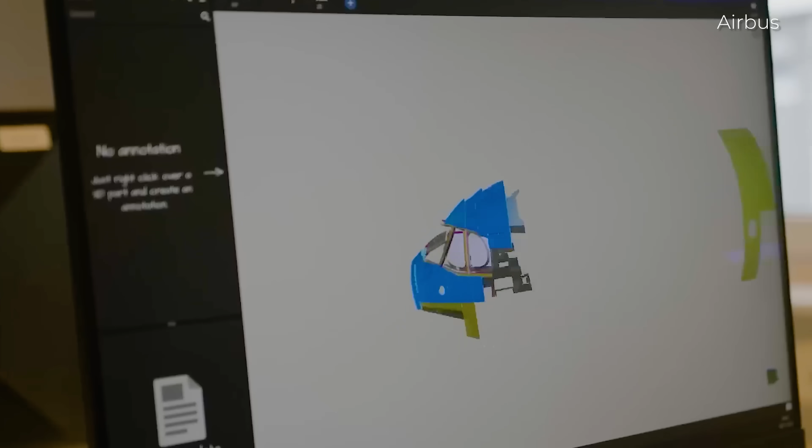For decades, Airbus and Boeing have shaped commercial aviation through successive aircraft, from the Airbus A300 in the 1970s and the Airbus A380 to the Boeing 777 family. Both manufacturers have redefined airline fleets worldwide. So in this video, we take a look at why Airbus has delayed its next clean sheet aircraft until at least 2031, what technologies are already under development, and why supply chain problems, engine delays, and record order backlogs have become a bigger priority than redesigning an entirely new airplane.

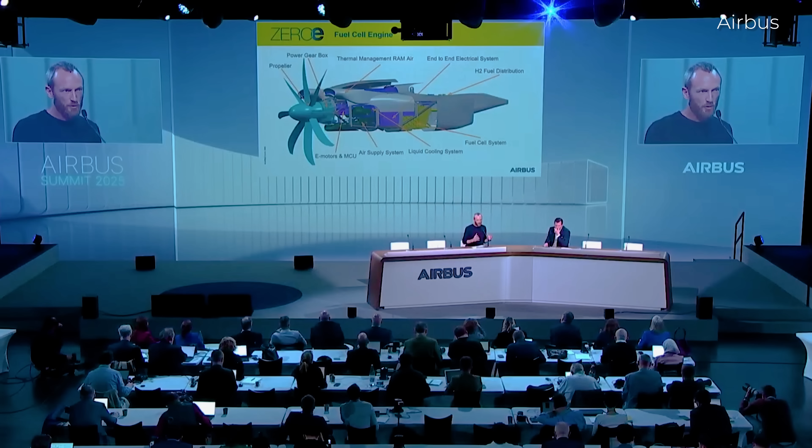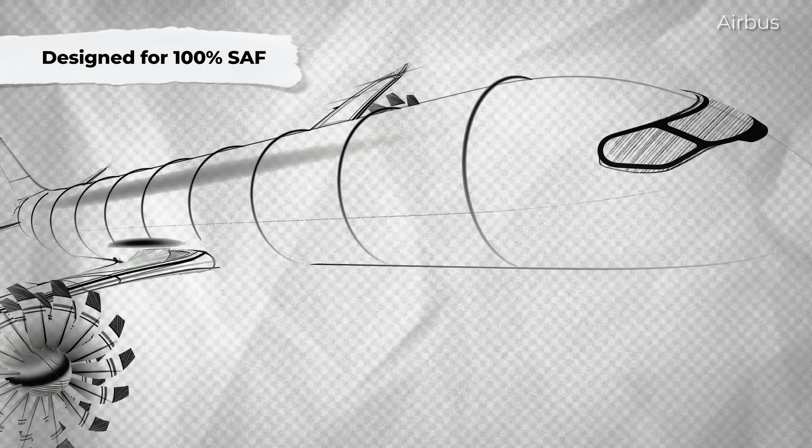During the Airbus Summit in Toulouse last year, the manufacturer outlined several of the developments and technologies it expects to feature on its future narrow-body aircraft. It said the aircraft would be designed to operate entirely on sustainable aviation fuel, or SAF, and target a 20 to 30% reduction in fuel burn.

One of the biggest changes under development is a new wing. Airbus is working on a longer and thinner wing that would improve lift and reduce drag. Plus, the design will incorporate folding wingtips. The concept draws inspiration from the flight characteristics of birds, particularly the albatross.

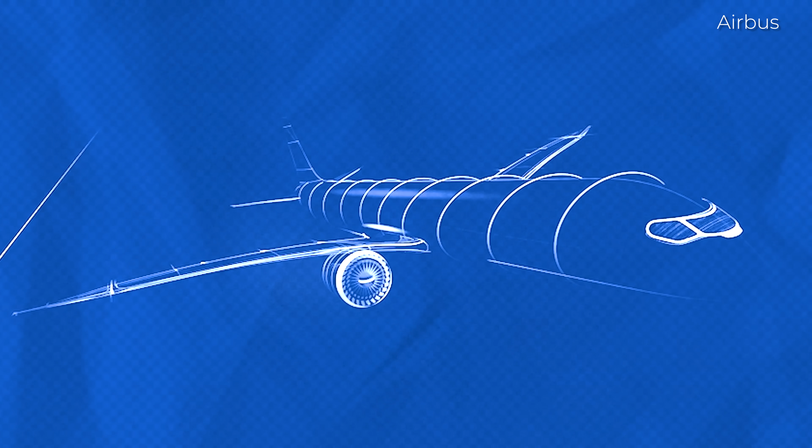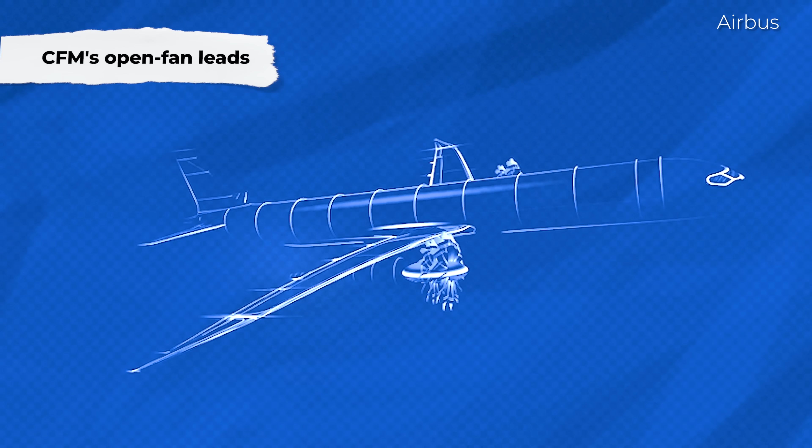Furthermore, it is currently evaluating several engine technologies for the aircraft. The leading option is the open fan concept, which is being developed by CFM International. Unlike today's turbofan engines, the design uses larger exposed fan blades instead of enclosing them within a nacelle. Airbus and CFM believe the technology could reduce fuel consumption and carbon emissions by around 20% compared with today's most efficient single-aisle engines.

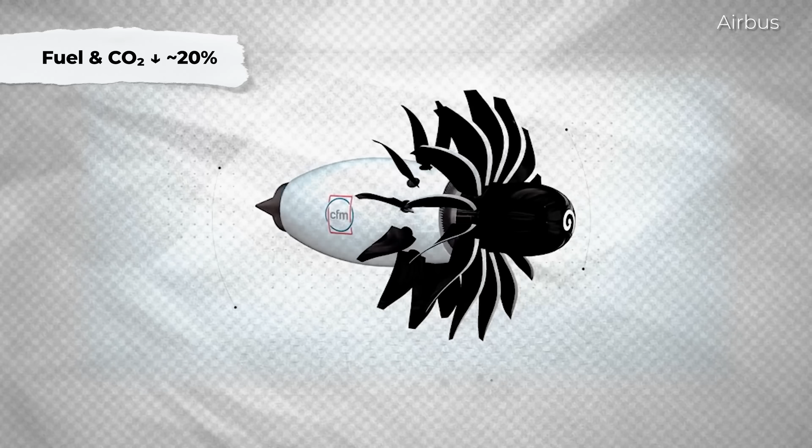Besides, the manufacturer is also studying lighter composite materials alongside a new aircraft systems architecture that brings together electrification, digital technologies, and connectivity.

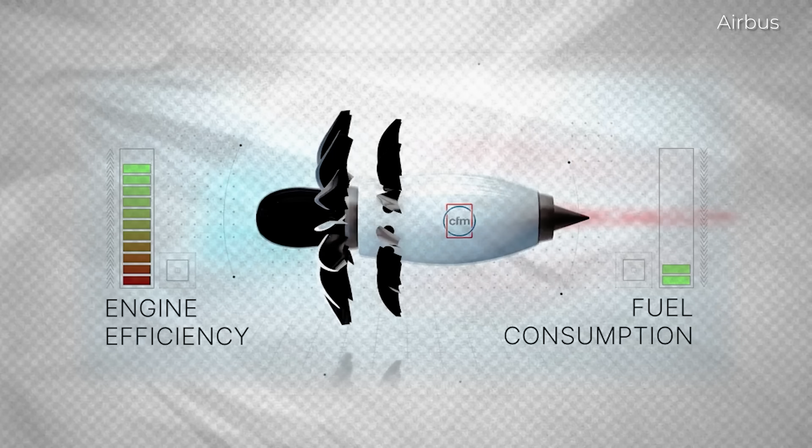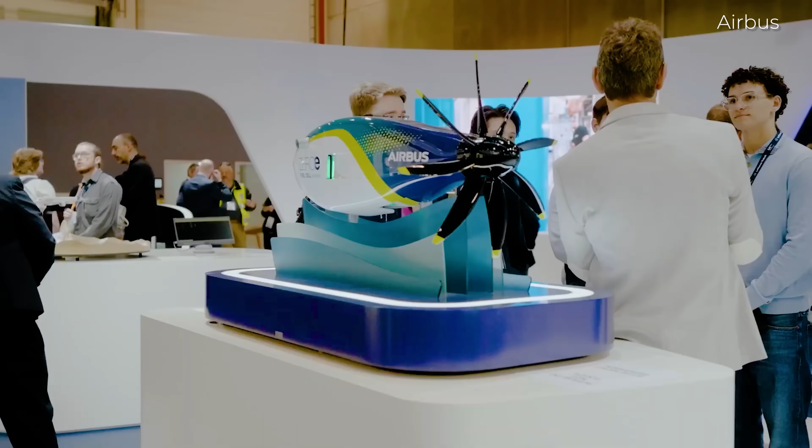Airbus had previously indicated that it was targeting around 2030 for the launch of its next all-new aircraft program. However, that timeline has now slipped as the company shifts its attention toward delivering the thousands of aircraft already on order. Speaking at the Berlin Aviation Summit on June 9th, Airbus CEO Guillaume Faury said that the company's engineering resources should remain focused on increasing production and delivering aircraft rather than developing a new airliner, as reported by Aviation Week.

He said, "We need to focus on priorities. I share this message with my suppliers. A good idea that is not focused on our priorities is a bad idea. Customers want to receive their planes as specified, on quality, on time."

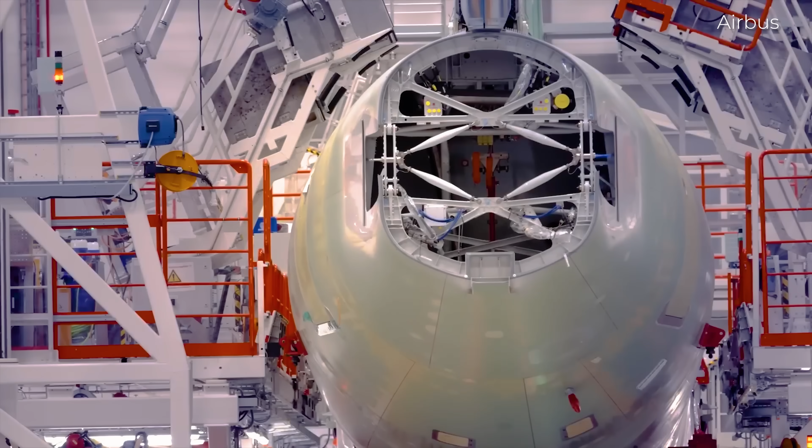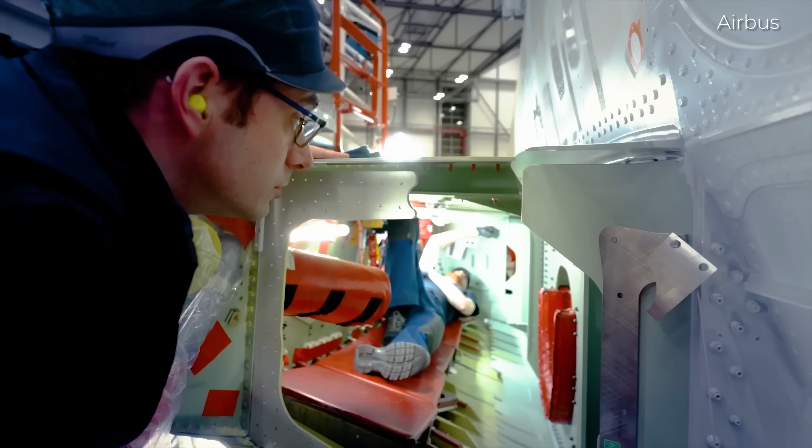During the first quarter of 2026, it delivered 114 aircraft, down from 136 during the same period a year earlier. Additionally, April deliveries also declined 5.7% year-over-year.

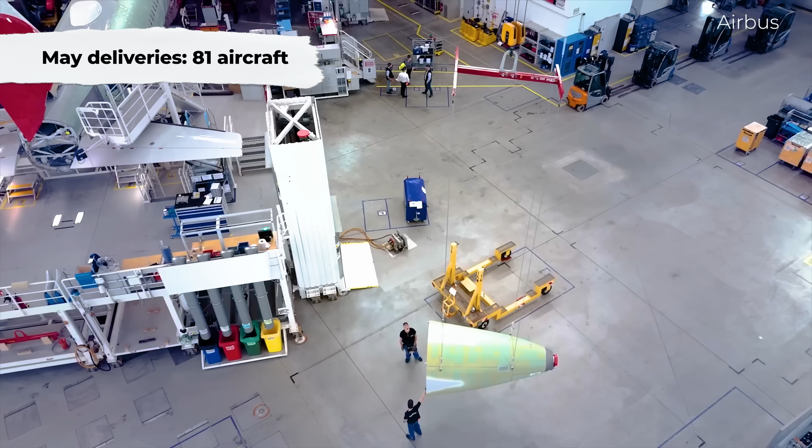There have, however, been signs of improvement. Airbus delivered 81 aircraft in May, marking its strongest monthly performance of the year and exceeding the total recorded during the same month in 2025.

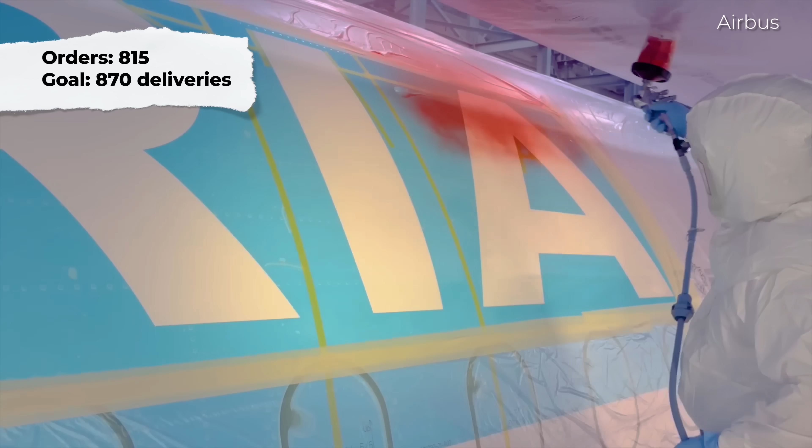Overall, it has booked 815 gross aircraft orders since the beginning of this year and continues to target 870 deliveries in 2026.

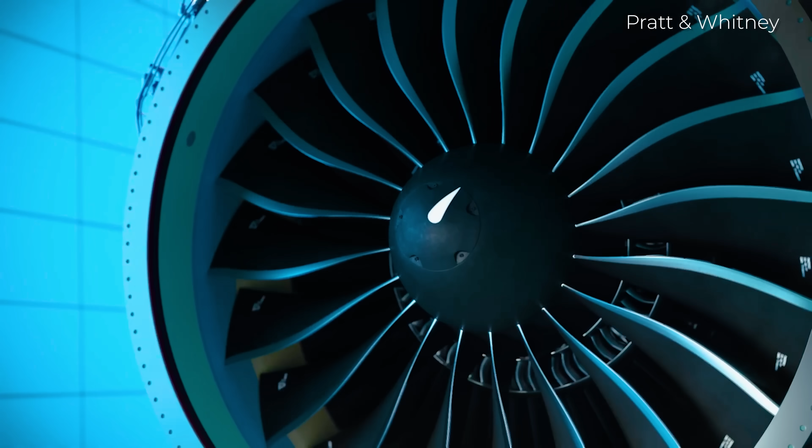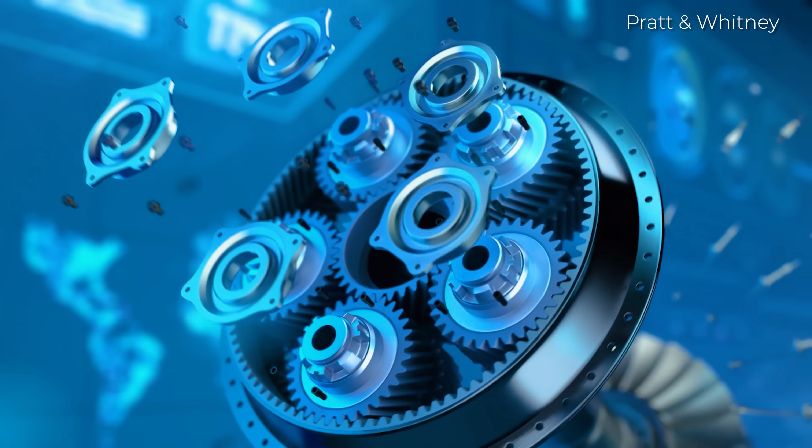One of the biggest factors slowing Airbus deliveries has been ongoing supply chain disruption, particularly involving Pratt & Whitney's geared turbofan, or GTF, engines. The engines power at least 40% of the A320neo family, Airbus's best-selling aircraft. However, Pratt & Whitney has been dealing with manufacturing issues involving contaminated powdered metal used in certain engine components. This has left hundreds of A320neo family aircraft grounded as airlines wait for engine inspections and repairs.

Along with that, it has also affected Airbus's production plans. The manufacturer has accused Pratt & Whitney of reducing the number of engines allocated to its final assembly lines.

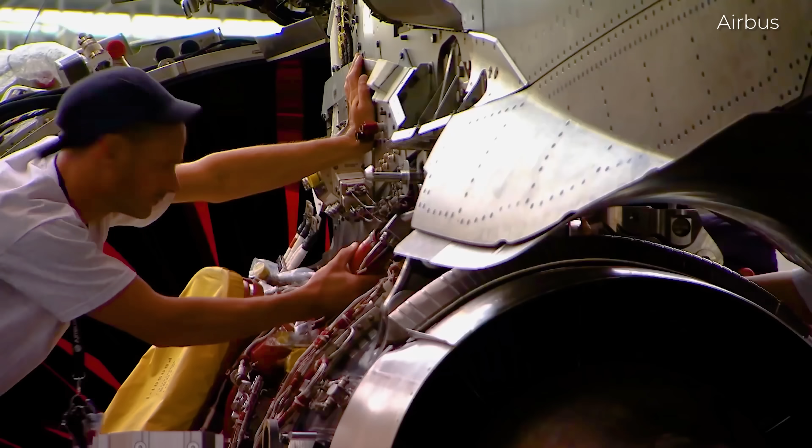Indeed, the A320 family remains the backbone of the manufacturer's commercial aircraft business. In fact, it became the most delivered airliner family in aviation history in October 2025. Such strong demand has led Airbus to steadily increase its production ambitions to 75 aircraft per month.

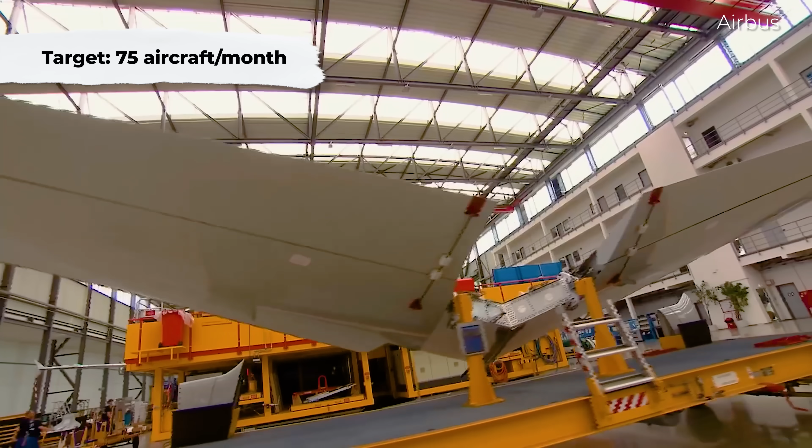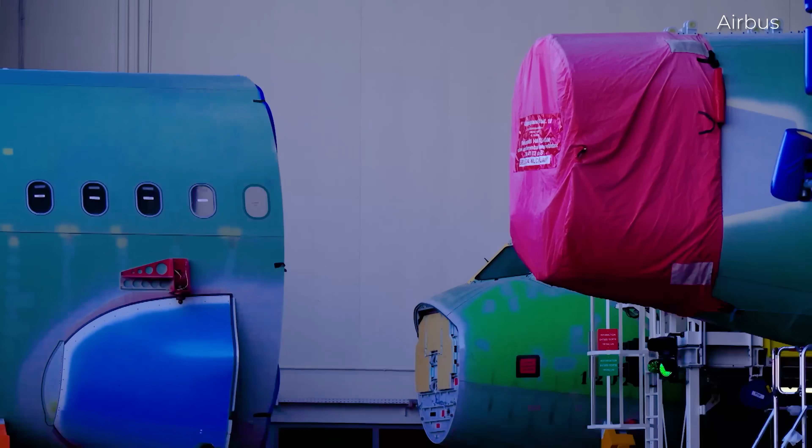Subsequently, to support higher production rates, it has continued expanding its industrial footprint. In October 2025, the manufacturer opened a second A320 family final assembly line in Mobile, Alabama, and also inaugurated a second A320 family final assembly line in Tianjin, China.

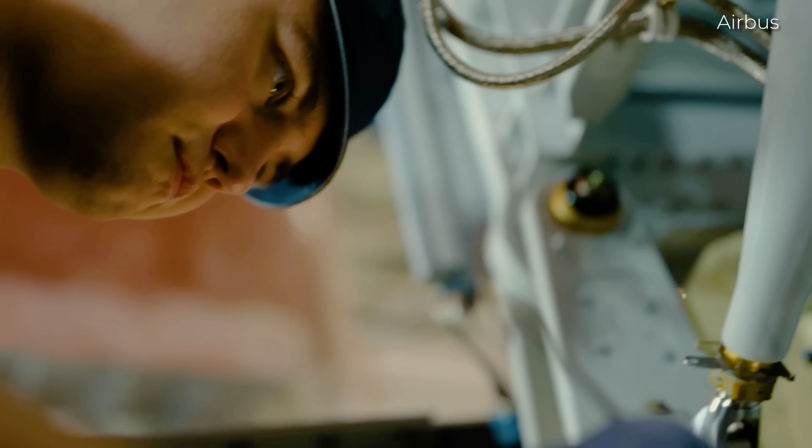However, ongoing engine delivery delays have forced Airbus to postpone its planned production target from 2026 to late 2027. Currently, the A320 family also accounts for the majority of Airbus's order backlog.

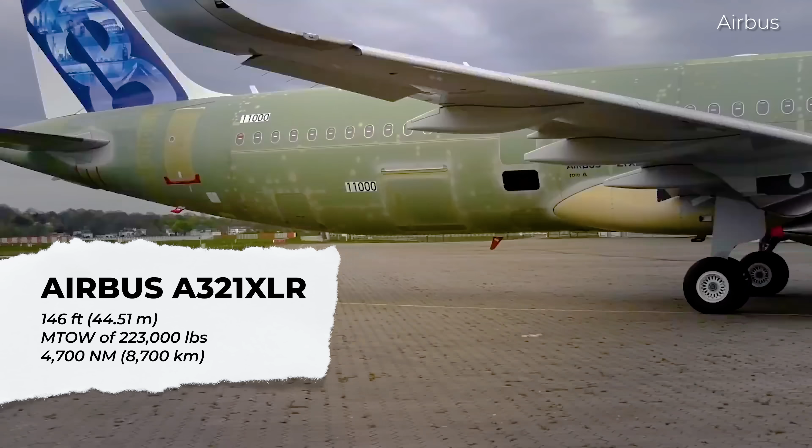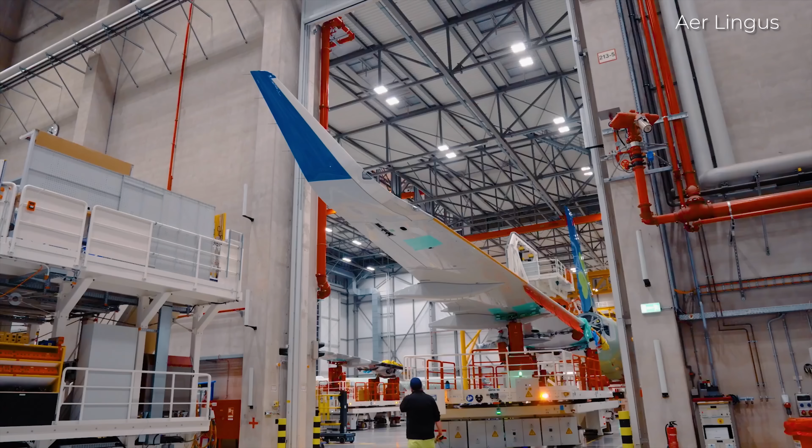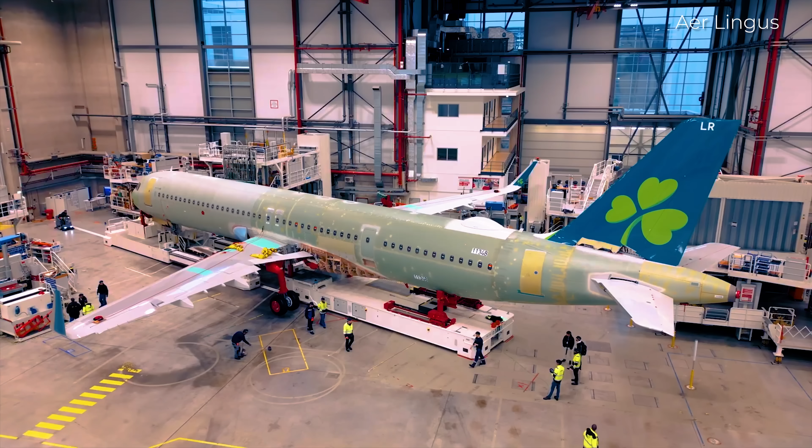Indeed, the challenges are perhaps best illustrated by the Airbus A321 XLR program. The extra-long-range narrow-body has experienced notable production delays as supply chain constraints continue. For instance, many of the components used across the program, including forgings, castings, brackets, wiring harnesses, and cabin sub-assemblies, are supplied by smaller Tier 2 and Tier 3 companies. Many of those suppliers have yet to fully recover from the labour shortage and financial pressures experienced during the COVID-19 pandemic. The aircraft has also faced delays involving engines, seats, galleys, and lavatories.

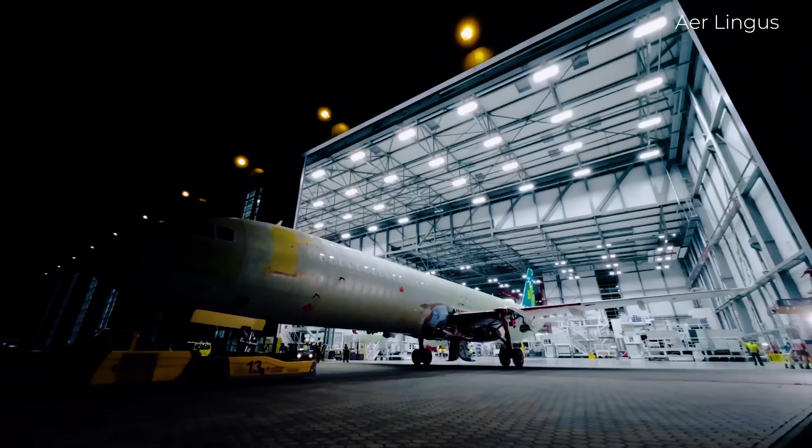Of course, the specific supplier varies depending on each airline's cabin configuration. Several airlines have publicly acknowledged the delays. On the XLR program, unfortunately, we have been on the receiving end of several delays in the program, and these aircraft are the better part of 2 years late from what we originally anticipated when we made the order, Air Canada Executive Vice President and Chief Commercial Officer Mark Nasr told Reuters.

Air Canada, which has ordered 30 A321 XLRs, received its first aircraft in April, while United Airlines took delivery of its first aircraft earlier this month.

Indeed, the size of Airbus's backlog alone explains why the manufacturer is prioritizing deliveries over launching a new aircraft program. However, another factor has also contributed to pushing the timeline further into the future: engine technology.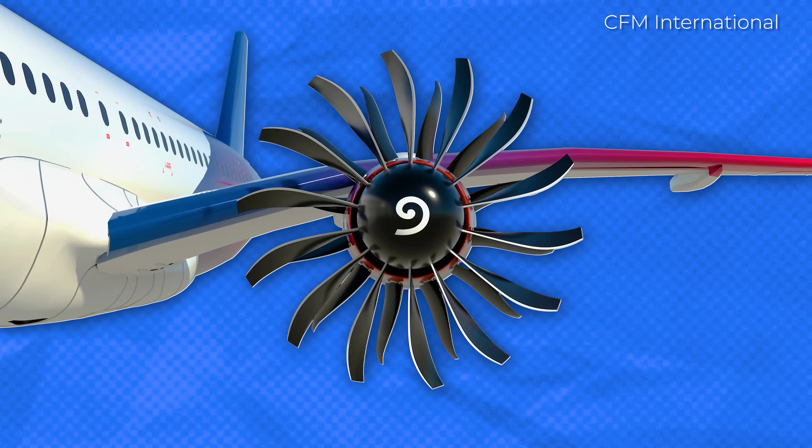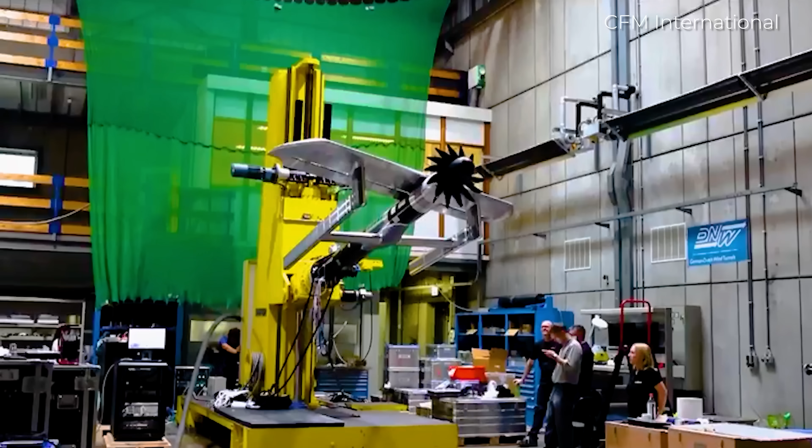The European plane maker is considering CFM International's Revolutionary Innovation for Sustainable Engines, or RISE, open fan concept for its future aircraft. Unlike conventional turbofan engines, the RISE concept uses an open fan architecture that leaves the fan blades exposed rather than enclosing them in a nacelle. This is designed to move a greater volume of air at lower speeds, improving propulsive efficiency.

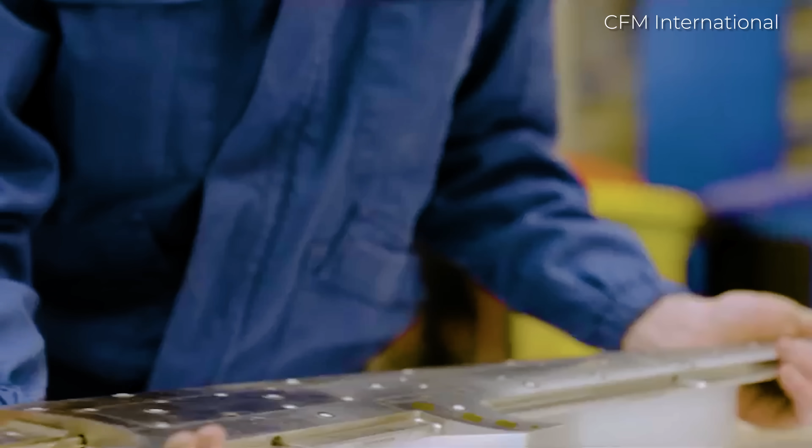In addition, the engine is also being developed for compatibility with 100% sustainable aviation fuel and potential hybrid electric technologies, which align with Airbus's long-term plans for its next-generation aircraft. Since the engine is expected to play a central role in the aircraft's performance, the manufacturer is unlikely to launch the program until the technology is more mature.

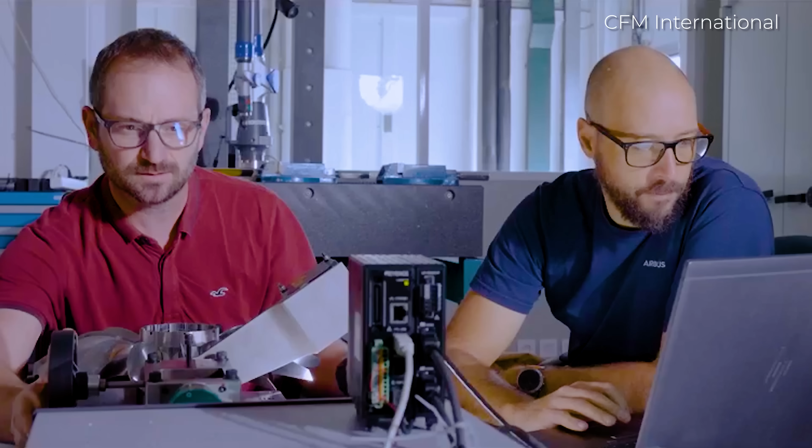Engine testing was initially expected to begin in 2027, but has since been delayed until 2029. As a result, an aircraft program launch before 2031 now appears increasingly unlikely.

Hopefully, Airbus will be in a position to launch its next all-new aircraft program sometime during the next decade. Given the challenges the manufacturer is currently facing, however, delaying that decision appears to be a strategic one rather than a technological limitation. Airbus has thousands of aircraft still to deliver, and ensuring those customers receive their orders has become the company's immediate priority.

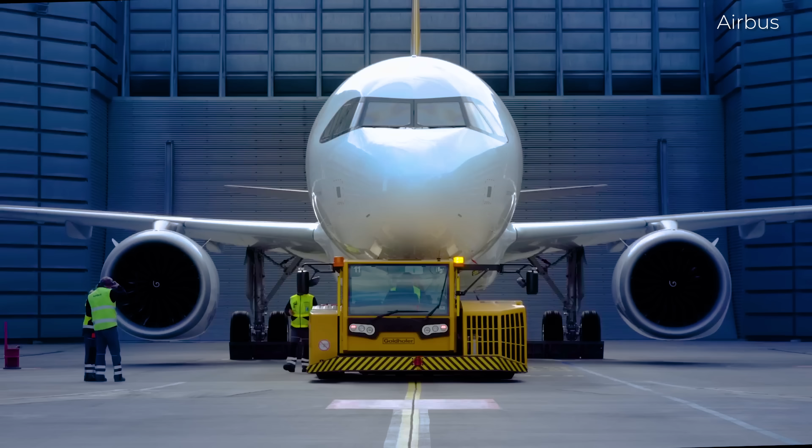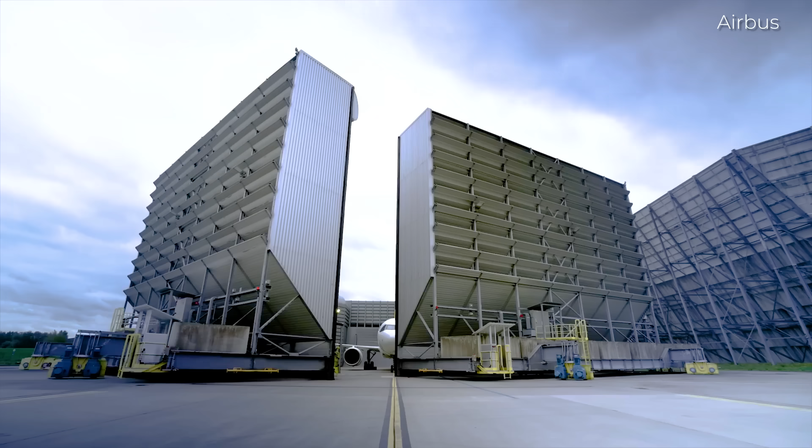A commercial aircraft consists of millions of individual parts sourced from suppliers around the world. Every component must arrive on time and meet strict quality standards before an aircraft can be delivered. Delays affecting even some critical parts can disrupt the entire production process. Under those circumstances, prioritizing deliveries over the launch of another major aircraft program is a logical step.

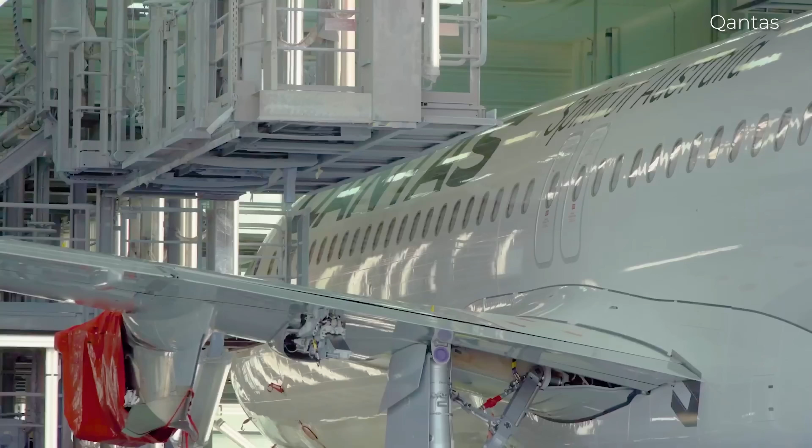More broadly, Airbus's decision reflects a wider shift taking place across the commercial aviation industry. The sector has moved from a growth phase, where manufacturers concentrated on developing new aircraft, to a delivery phase focused on increasing production, stabilizing supply chains, and working through record order backlogs. If the current timeline holds, Airbus's next all-new aircraft program is now expected to launch roughly 27 years after the A350 program.